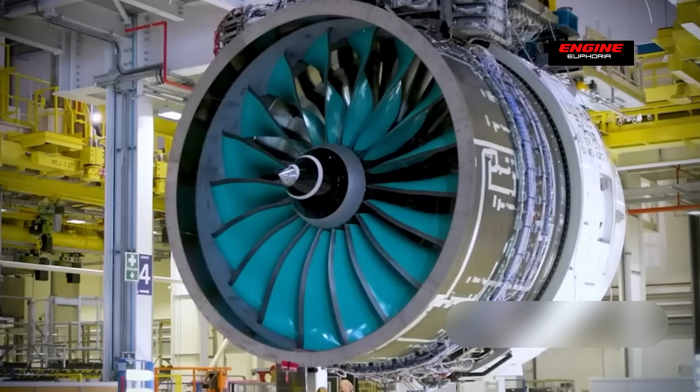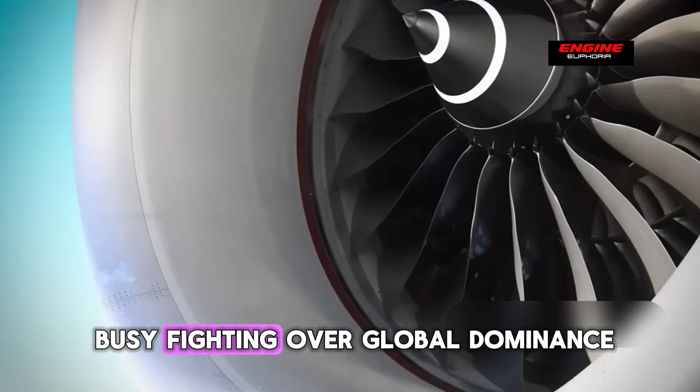Everyone thought Rolls-Royce was finished. After massive layoffs, canceled contracts, and years of silence, the aviation world just, well, stopped watching. Boeing and Airbus were busy fighting over global dominance. GE was showcasing its record-breaking engines. And Rolls-Royce, honestly, was just a name from the past, a legacy brand with no new edge.

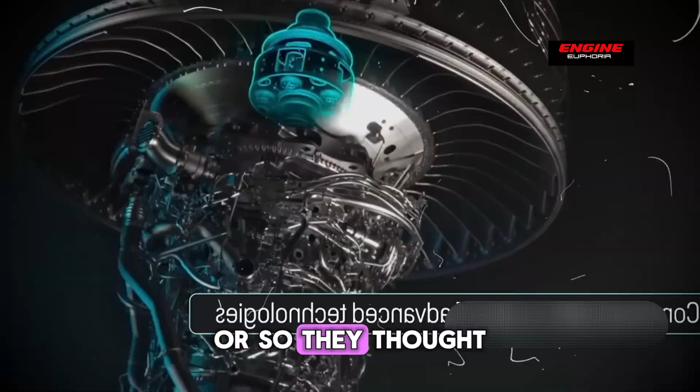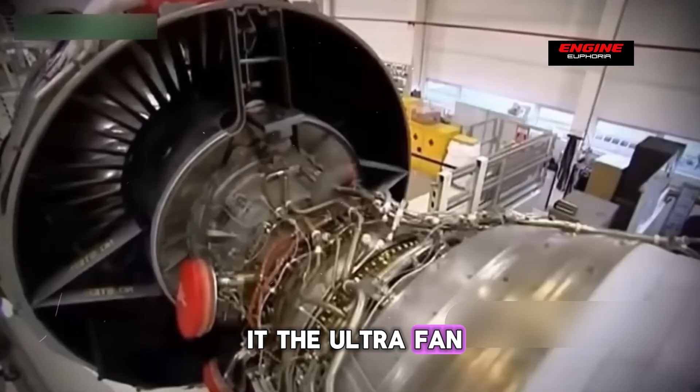Or so they thought. Because while the industry moved on, Rolls-Royce went dark for a reason. Behind closed doors they were building something no one expected. Not a minor update, not a concept sketch, but a fully functional prototype of the most advanced jet engine ever created. They call it the UltraFan. And it doesn't just outperform their last generation. It leapfrogs the entire industry.

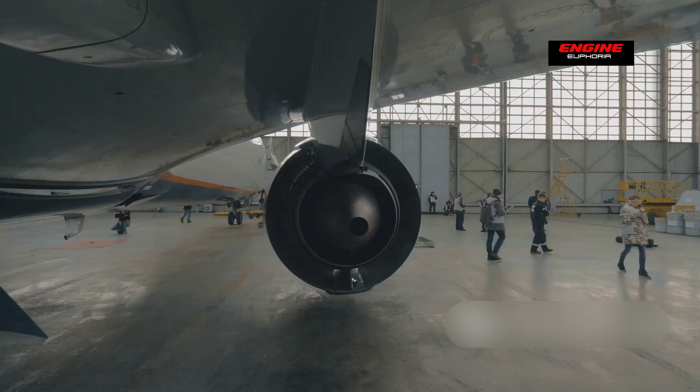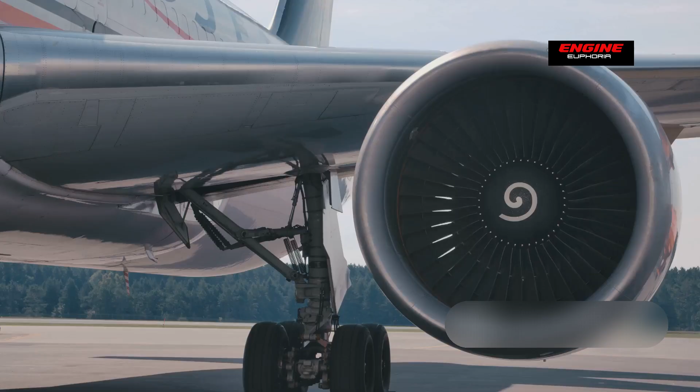It's bigger, lighter, smarter, more efficient, and more importantly, it's not a theory. It works. It's already been tested successfully. While Boeing scrambled with delays and Airbus doubled down on old tech, Rolls-Royce quietly made a move that could flip the entire aviation hierarchy. Because UltraFan isn't just an engine, it's a turning point. It's designed to run on sustainable fuels. It's compatible with hydrogen and hybrid systems, and it delivers up to 25% better fuel efficiency than anything Rolls-Royce has ever built.

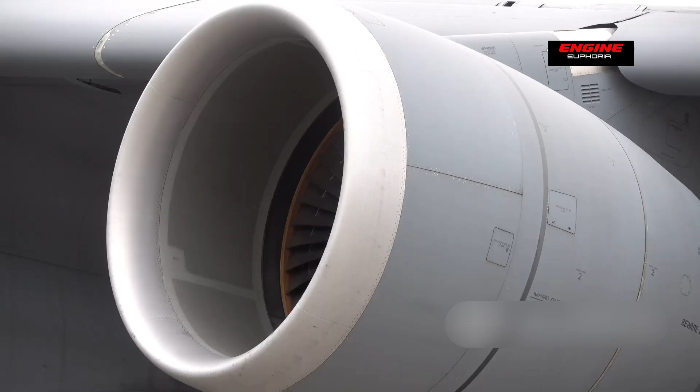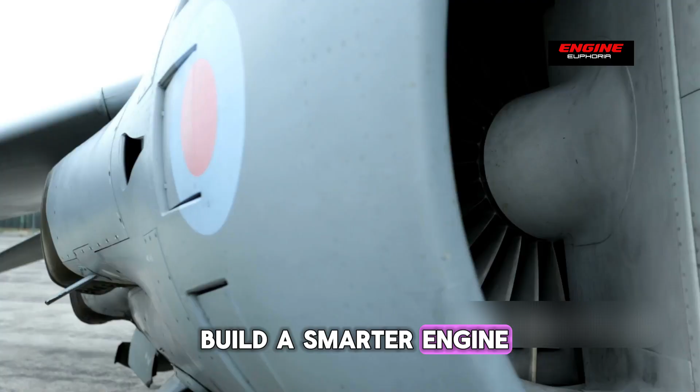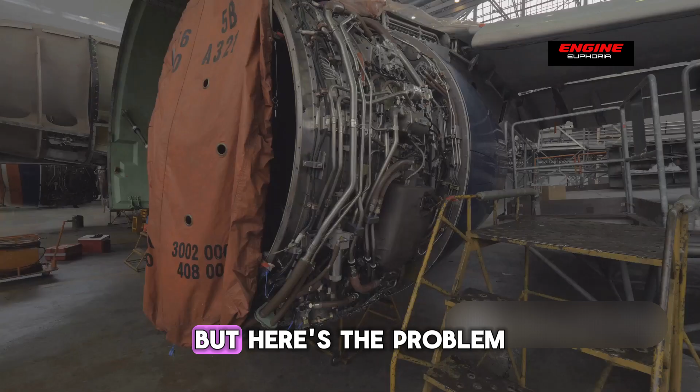The story gets even more interesting because Rolls-Royce didn't just build a smarter engine. They built a direct challenge to the reigning heavyweight, the GE9X. This thing is a monster, 134,000 pounds of thrust. A record-breaking engine made specifically for the Boeing 777X. All muscle, all power. But here's the problem. It's trapped in the past. The GE9X is huge, heavy, and locked into a single aircraft type.

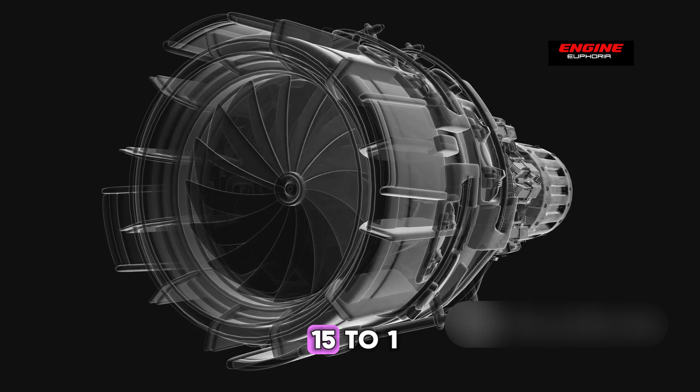Rolls-Royce looked at that and took a different path. They built the UltraFan with modularity in mind. Instead of chasing more thrust, they chased more control. A gearbox that lets the fan and turbine spin at their own perfect speeds. A bypass ratio over 15:1, the highest ever seen in commercial aviation. That alone cuts fuel burn by over 25% compared to the Trent XWB.

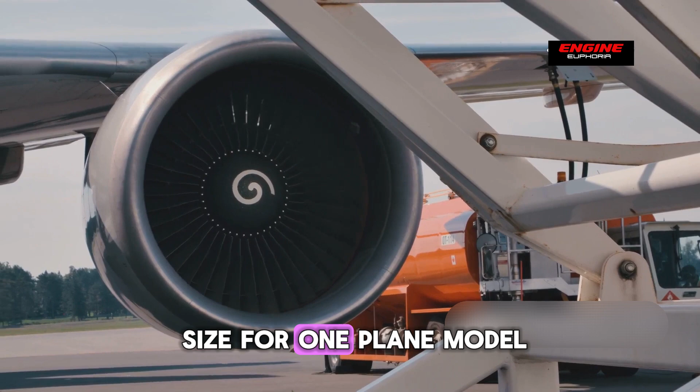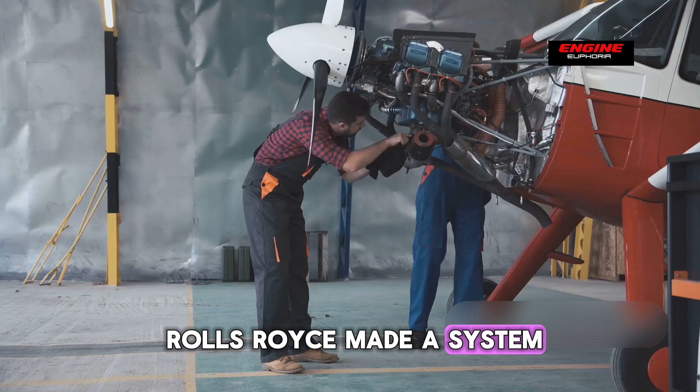And unlike GE's one-size-for-one-plane model, the UltraFan is scalable. Same core, different thrust classes. It can power wide bodies, narrow bodies, and future hydrogen-electric aircraft, all with one platform. GE made a statement. Rolls-Royce made a system. So now the industry is facing a choice. More thrust or more future. Because UltraFan might not be the loudest engine in the sky, but it could be the one flying the longest.

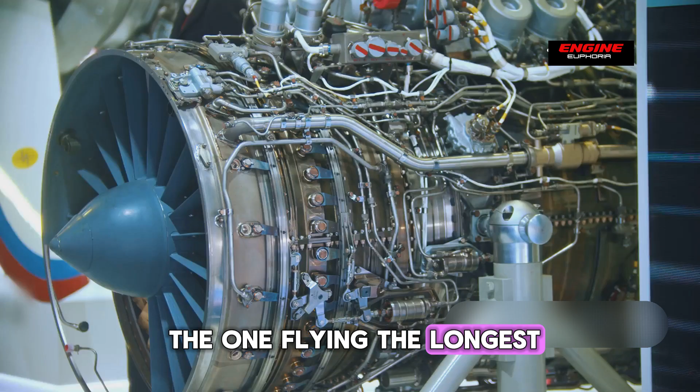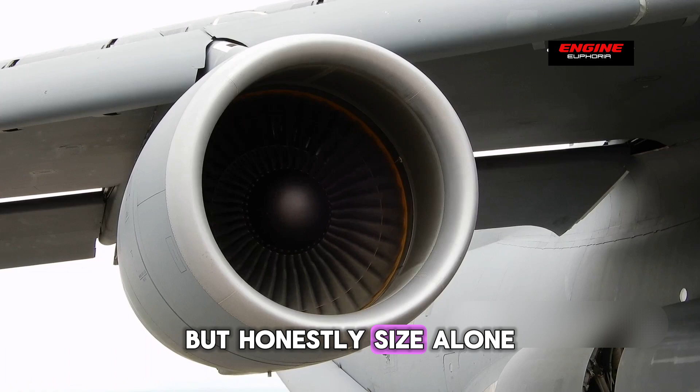And if you're wondering how Rolls-Royce pulled this off, it comes down to engineering precision at every level. Let's start with that massive 140-inch fan. It's actually the largest ever made for a commercial jet engine. But, honestly, size alone isn't what makes it revolutionary. Each blade is forged from carbon composites reinforced with titanium edges. That means it's strong enough to survive a bird strike, but at the same time, light enough to save serious weight.

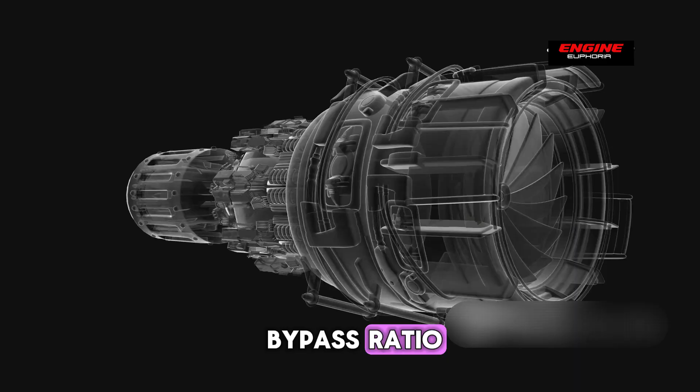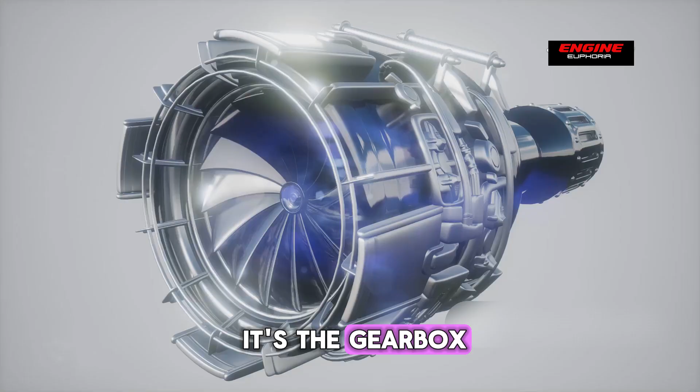Now combine that with a 15:1 bypass ratio. More air bypasses the engine core, creating more thrust with less fuel. Quieter, cleaner, more efficient. Yeah, that's the sweet spot every engine maker has been chasing. UltraFan got there first. But the real secret? It's the gearbox. It decouples the fan from the turbines, allowing both to spin at their ideal speeds. It's kind of like giving the engine multiple gears and it makes everything more efficient.

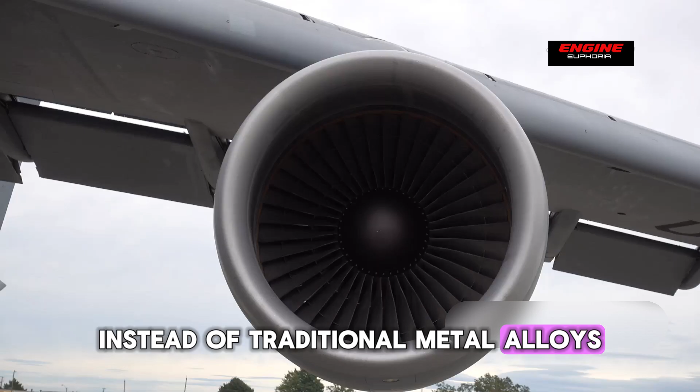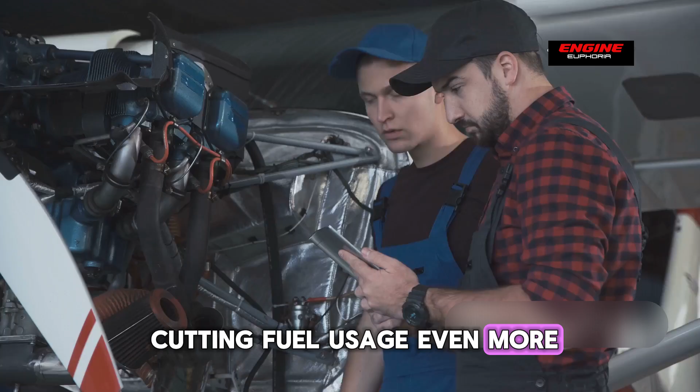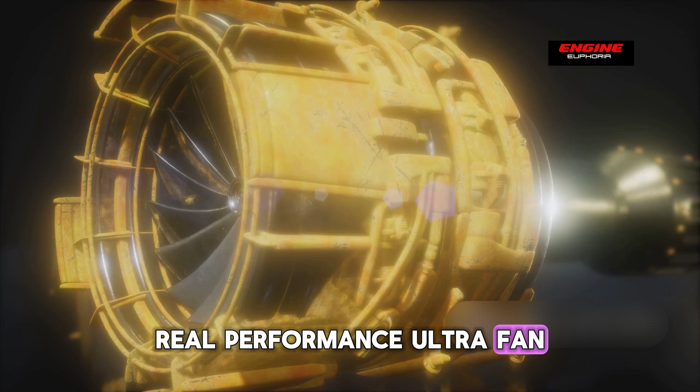Inside the core, Rolls-Royce took it even further. Instead of traditional metal alloys, they used ceramic matrix composites. These materials handle insane heat and pressure, letting the engine run hotter, boosting thermal efficiency, and cutting fuel usage even more. And none of this is hypothetical. It's been tested, verified. 64 megawatts of power through the gearbox. A world record. Real numbers. Real performance. UltraFan isn't a prototype. It's a proof of concept that works.

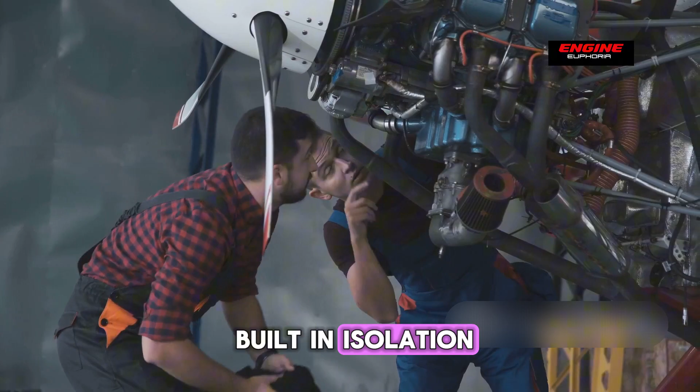And it's all part of something much bigger. Because this engine wasn't built in isolation. UltraFan didn't come out of nowhere. This engine is the product of 4 decades of relentless engineering. Every breakthrough, every failure, every lesson compressed into one machine.

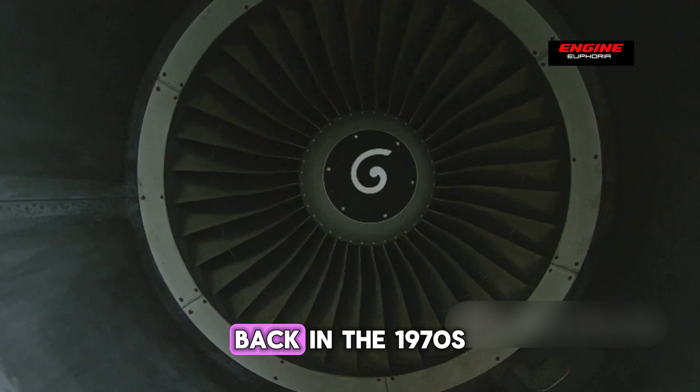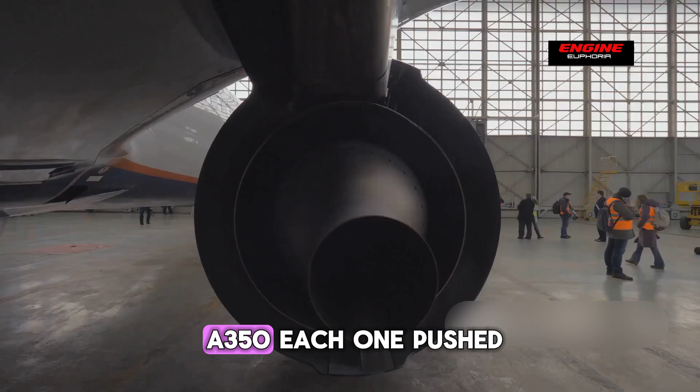Back in the 1970s, Rolls-Royce changed the game with the RB211, introducing the 3-shaft engine design that set the foundation for modern long-haul travel. Then came the Trent series, the 700, the 900, the XWB. Each one powered flagship aircraft like the A330, the A380, and the A350. Each one pushed the limits on efficiency, performance, and emissions. But even the Trent XWB, the most efficient engine in commercial use today, had its limits.

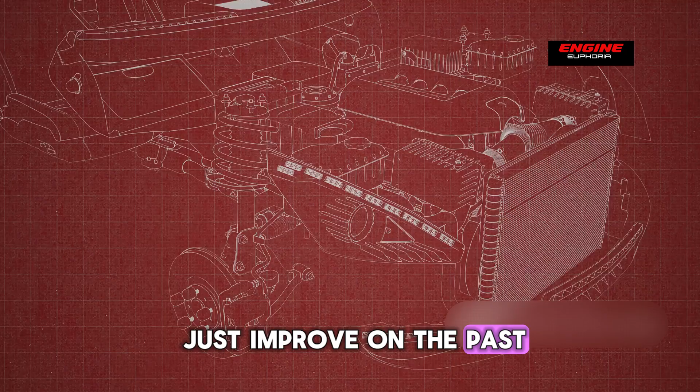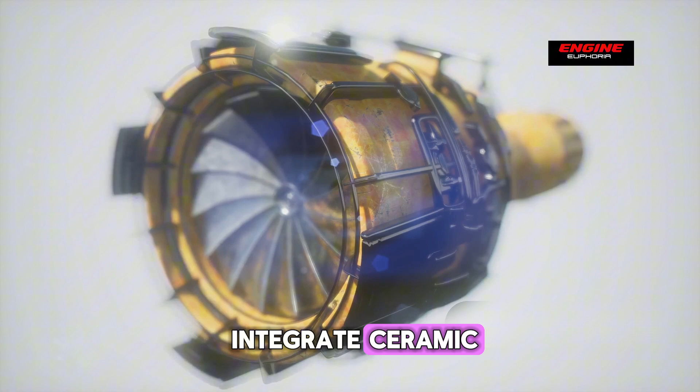Rolls-Royce knew they couldn't just improve on the past, they had to start over. UltraFan is not a Trent evolution, it's a clean sheet design. It's the first time Rolls-Royce used geared architecture in a wide-body class engine. It's the first to integrate ceramic matrix composites in critical hot zones. And it's the first to adopt large-scale 3D printing for structural components, cutting weight, increasing durability, and reducing waste.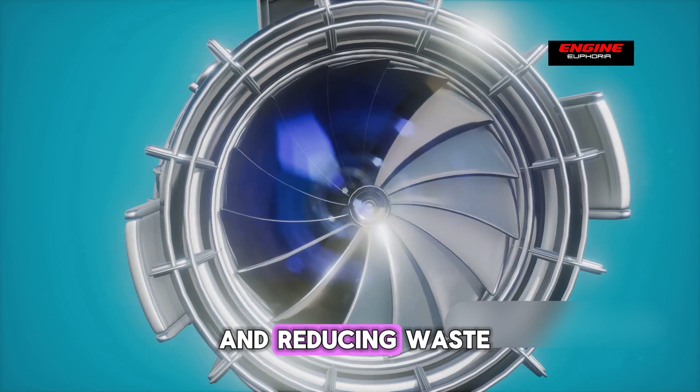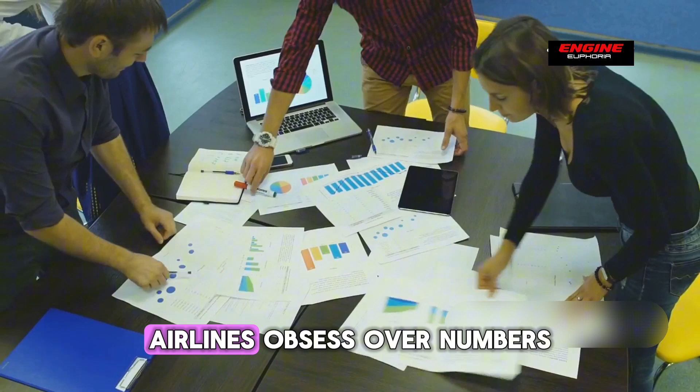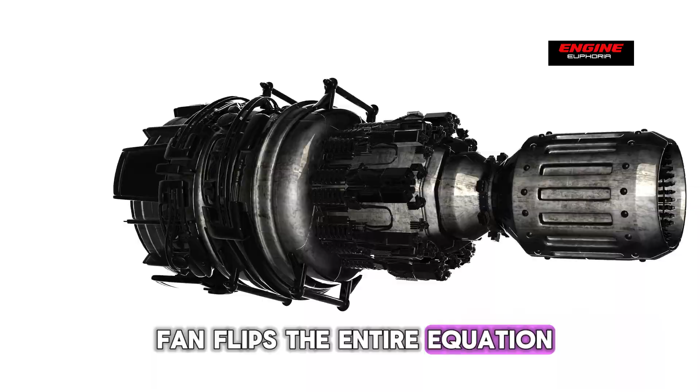But here's the part the public doesn't always see. While most people obsess over thrust and size, airlines obsess over numbers: operating costs, maintenance, fuel burn, regulatory penalties. And that's where UltraFan flips the entire equation. This engine cuts fuel consumption by up to 25% compared to the Trent XWB. That's not marketing fluff. That's millions of dollars in savings per plane per year.

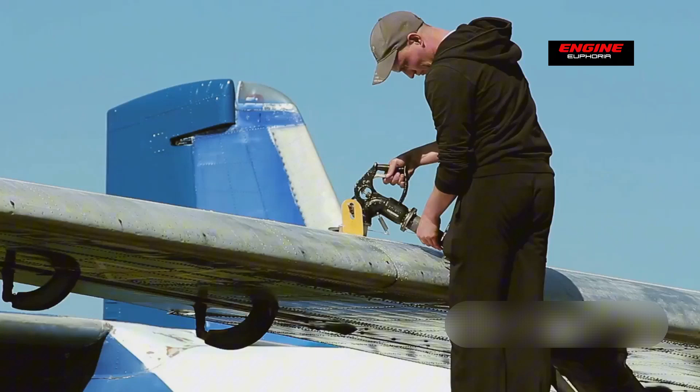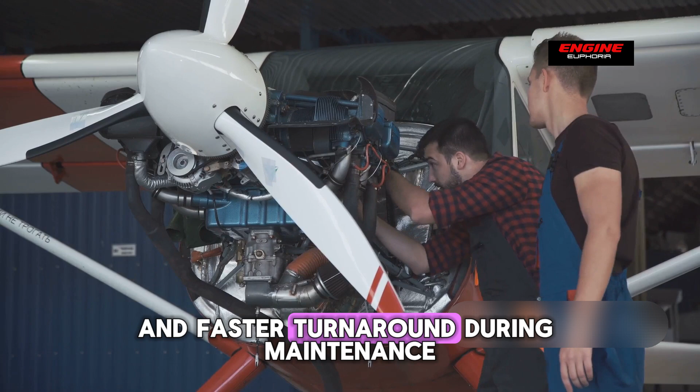At a time when jet fuel eats up over 30% of an airline's total expenses, UltraFan isn't just impressive, it's financially irresistible. And it doesn't stop at fuel. UltraFan's modular construction means fewer unique parts and faster turnaround during maintenance. Its cooler operating temps mean less wear on components. It uses predictive analytics to spot potential issues before they happen, avoiding delays, grounding time, and surprise failures.

And in the background, the pressure is mounting. Governments aren't asking airlines to reduce emissions anymore, they're mandating it. The EU's Fit for 55 initiative is already penalizing high-emission flights. The International Civil Aviation Organization is setting global caps. Even passengers are choosing flights based on environmental impact.

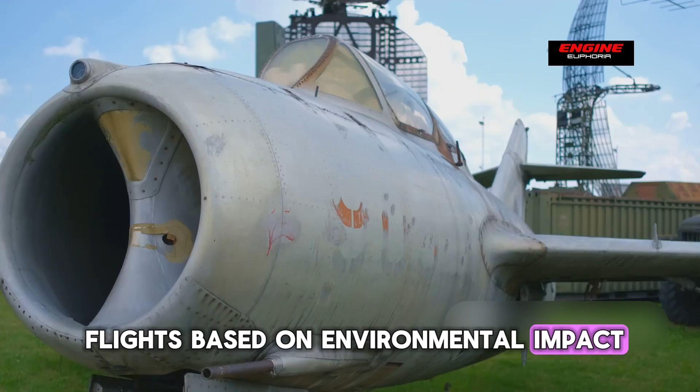The old jet engines were built for an era that's rapidly disappearing. UltraFan is built for what's next. It's ready for 100% sustainable aviation fuel from day one. It's designed with future hydrogen systems in mind, and it's built to evolve, to shift into a hybrid electric role when the time comes. This engine doesn't need to be retrofitted for the future, it's already there.

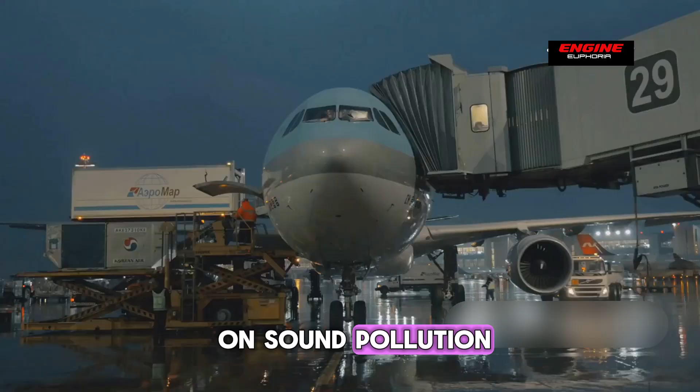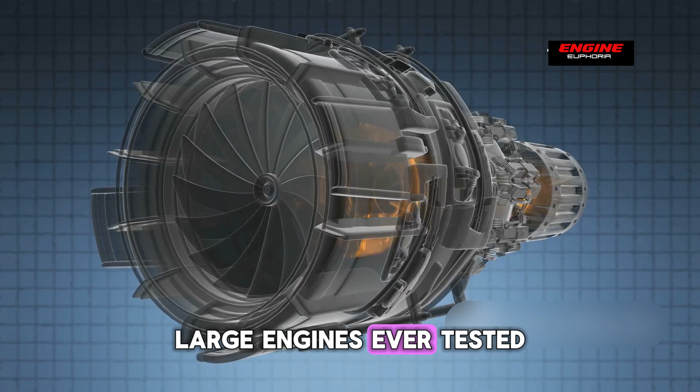And then there's noise, an invisible cost most people forget. Airports across Europe and Asia are cracking down on sound pollution. Noisy aircraft lose takeoff slots, face fines, or get banned from night operations entirely. UltraFan's high bypass ratio and smart gearbox architecture make it one of the quietest large engines ever tested. That means airlines can operate longer hours in more locations with fewer restrictions, which translates directly to more revenue.

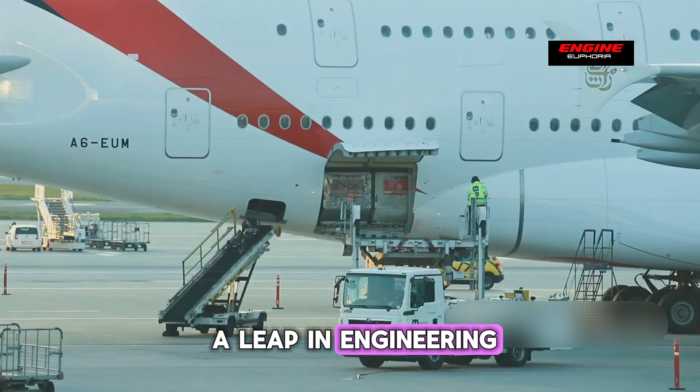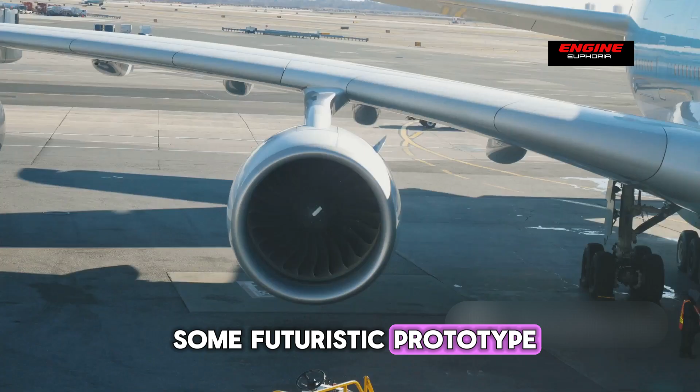So when airlines look at UltraFan, they don't just see a leap in engineering, they see lower fuel bills, fewer delays, reduced carbon taxes, increased flexibility, and better margins. And that's why the industry is paying attention now. Because UltraFan isn't some futuristic prototype, it's the sharpest economic tool airlines have seen in...

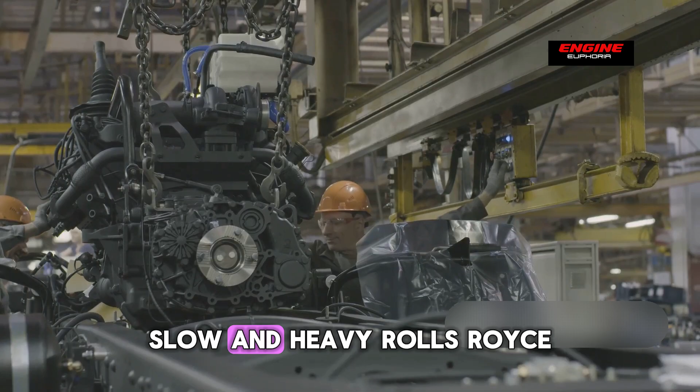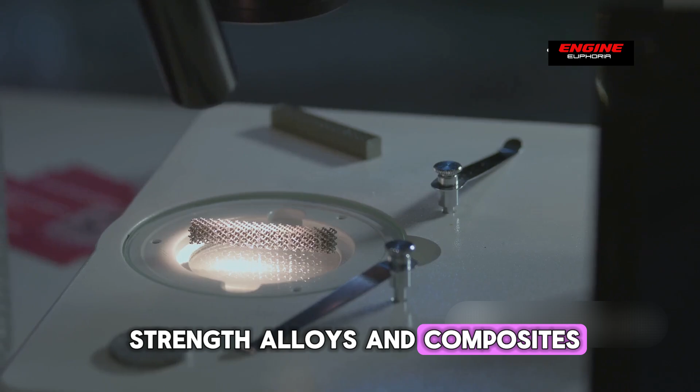Traditional jet engines are made using casting, welding, and machining processes that are complex, slow, and heavy. Rolls-Royce flipped the script. UltraFan's critical components, including blades, brackets, and internal supports, are printed using high-strength alloys and composites. This allows for more intricate airflow designs, less material waste, and lighter parts with higher heat tolerance.

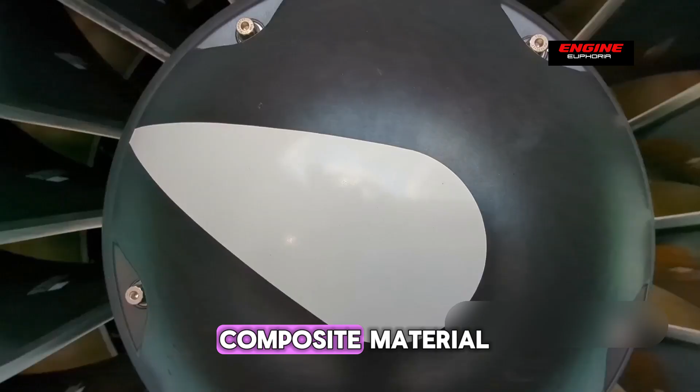Even the massive 140-inch fan blades aren't conventional. They're made from carbon composite material, lighter than titanium, but reinforced with titanium leading edges for durability. That combination reduces overall engine weight while increasing strength. A rare win-win in aerospace design.

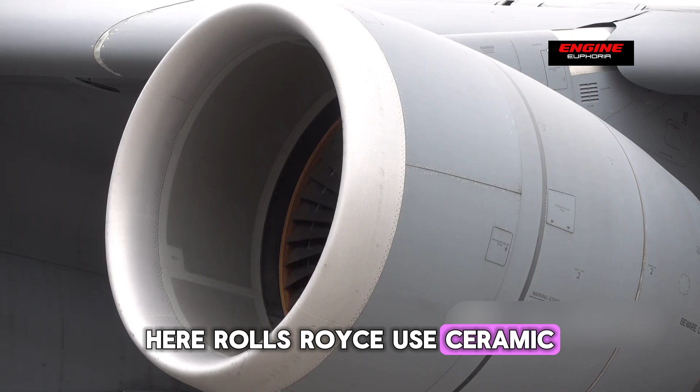And let's talk about the core, the most extreme environment inside the engine. Here, Rolls-Royce used ceramic matrix composites, or CMCs, a material that can handle temperatures far beyond what metal alloys can tolerate. This means the engine can run hotter, which boosts thermal efficiency and cuts down on fuel use. CMCs are also lighter and more resilient, reducing fatigue over time.

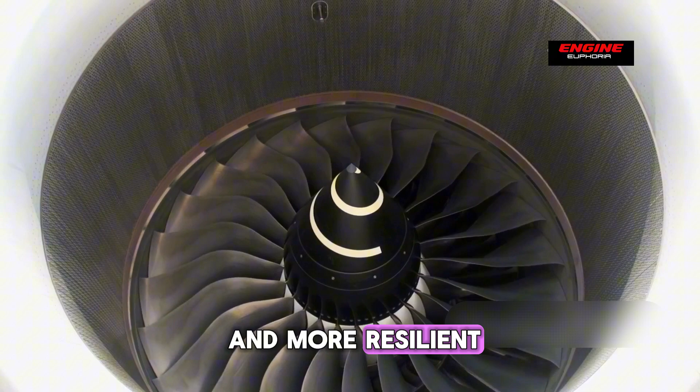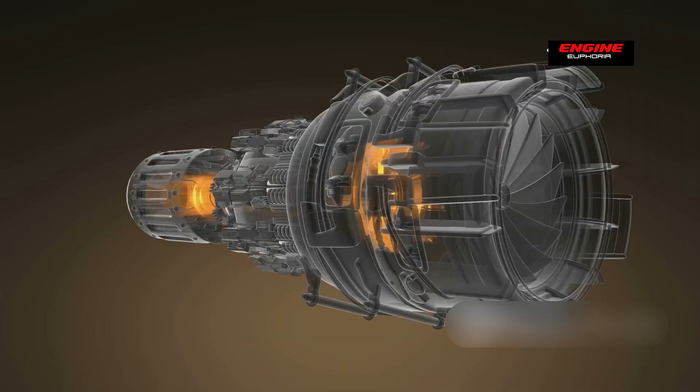And then there's the gearbox, the crown jewel of UltraFan's architecture. It allows the fan to rotate slower while the turbines spin faster, letting each section operate at its optimal speed. This not only reduces fuel burn, but also cuts engine stress and opens the door for modular scalability across aircraft types.

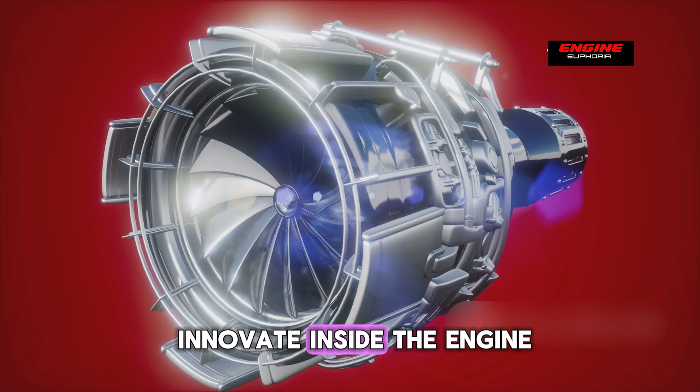But Rolls-Royce didn't just innovate inside the engine. They reimagined how the engine integrates with the aircraft, and for that, they formed a dangerous alliance. Because back in 2018, Rolls-Royce quietly signed a deal with Airbus. The goal: to flight test UltraFan as part of a full integration system, not just as a drop-in engine, but as a complete propulsion architecture, engine, pylon, nacelle, all built together, optimized together.

This partnership wasn't just a handshake, it was co-funded by the European Union's Clean Sky 2 program, a €4 billion research initiative focused on slashing aviation emissions. Airbus knew what it wanted, a path toward the next generation of long-haul and short-range aircraft built with sustainability baked in, not bolted on. And Rolls-Royce? They wanted their engine flying first on the biggest platforms in Europe. It was a perfect match.

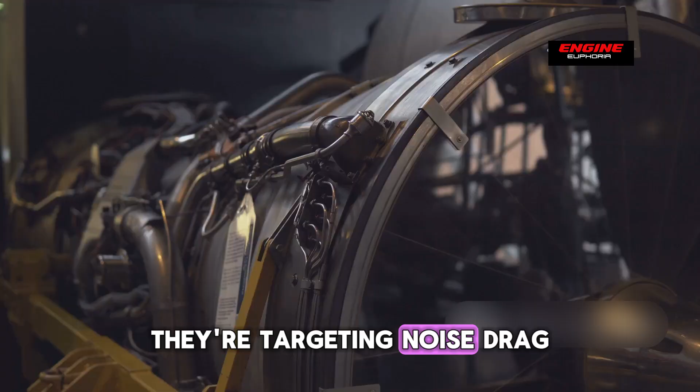Together, they're building integrated power plant systems that go beyond thrust. They're targeting noise, drag, fuel economy, even manufacturing techniques like high-rate thermoplastics and automated welded assemblies that can scale fast.

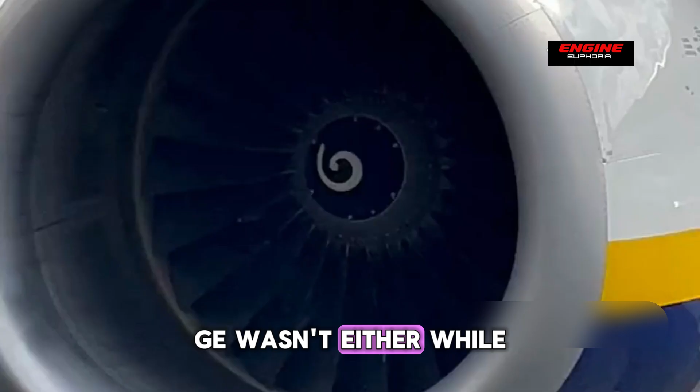And Boeing? They weren't in the room. GE wasn't either. While Boeing bets everything on the GE9X and its aging partnerships, Airbus and Rolls-Royce are co-developing the future in silence. And speaking of silence, UltraFan has one more advantage that almost no one talks about, but every

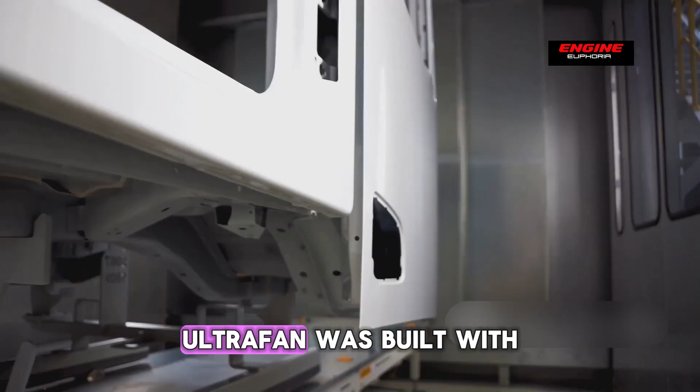airport cares about: noise. Jet engine noise has been one of the biggest thorns in the side of the aviation industry for decades. Takeoffs and landings generate the most complaints from communities living near airports, and governments are starting to respond not just with noise fines but with restricted flight slots, curfews, and operational bans. UltraFan was built with this reality in mind.

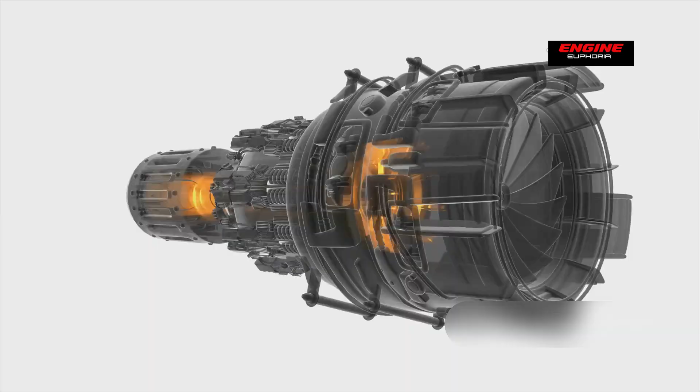Thanks to its ultra-high bypass ratio, the fan moves more air at lower velocities, which naturally produces less noise. And the gearbox design reduces fan speed even further, especially during takeoff and descent, the noisiest parts of flight. The result? A massive drop in decibels without sacrificing performance. For airlines, this means fewer regulatory headaches.

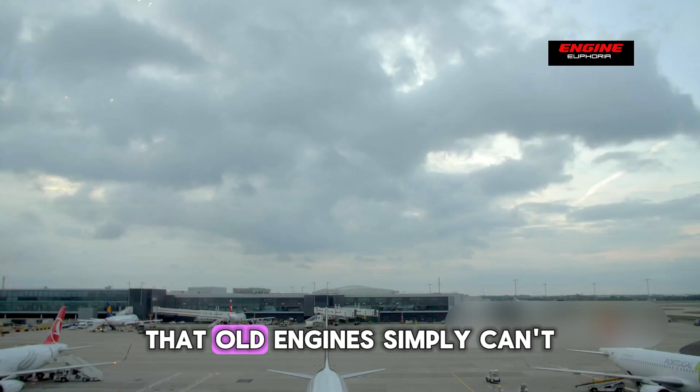They can operate into noise-sensitive airports, fly at night, and apply for additional flight slots that noisier aircraft are barred from. It's not just about passenger comfort, it's about access, flexibility, and revenue. And for airport authorities, quieter engines make expansion plans easier to approve because UltraFan-equipped aircraft meet stricter noise targets that old engines simply can't. It's a subtle advantage, but a strategic one. Because as more countries start treating airport noise like pollution, the quietest engines will have the loudest commercial impact.

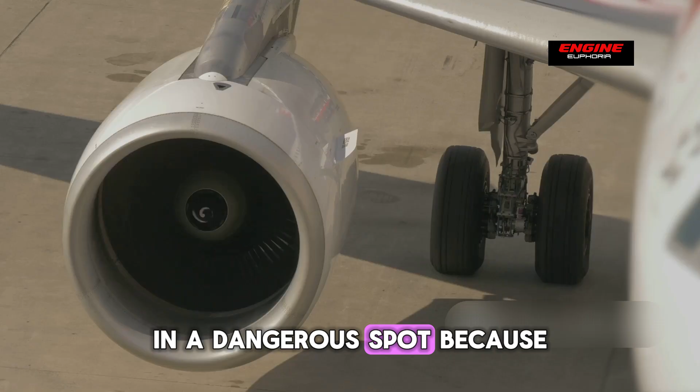So now you've got a jet engine that's not only powerful and efficient, it's light, it's modular, it's future-ready, and it's quiet. So where does this leave Boeing? In a dangerous spot. Because while Airbus and Rolls-Royce quietly moved toward full integration, Boeing stayed tied to GE and to legacy engine architectures that were optimized for raw power, not future flexibility. The GE9X is undeniably powerful. It's also enormous, tightly coupled to the 777X platform and built with a narrower focus.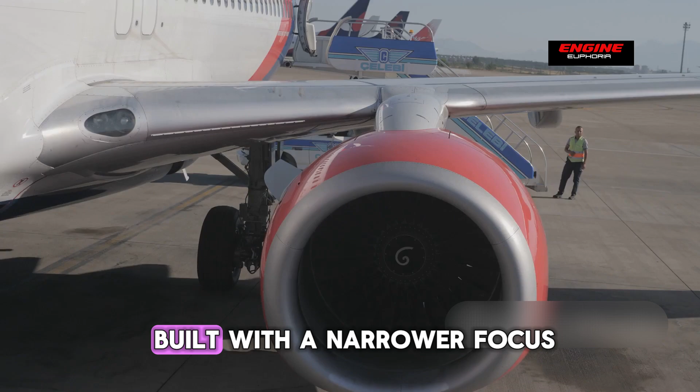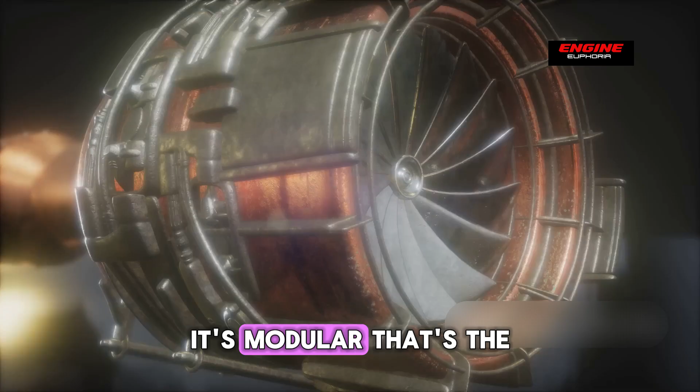And here's the issue. The 777X program has been plagued by delays, years behind schedule. Certification pushed back, orders reduced. Meanwhile, UltraFan doesn't just power one plane, it's modular. That's the part few people grasp, but it's the real masterstroke. UltraFan was built to scale: same-core architecture, multiple thrust classes. It can be tuned for narrow-body jets, long-haul wide-bodies, and even future hybrid electric or hydrogen propulsion systems. It's not one engine, it's an entire ecosystem.

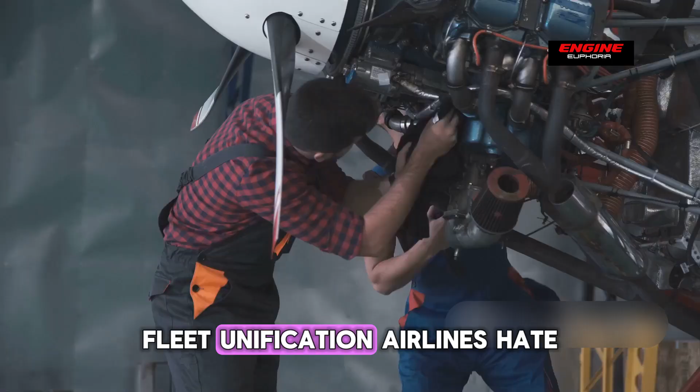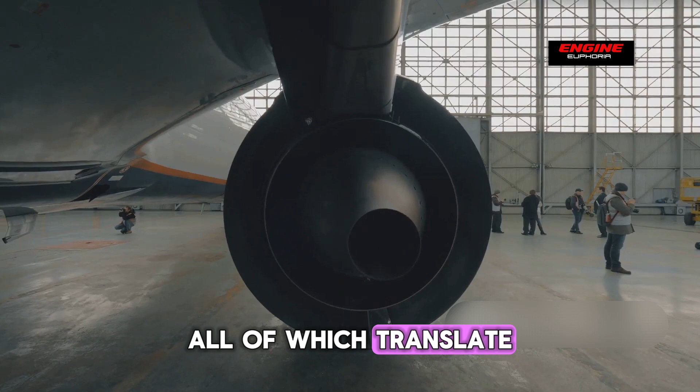And that modular design opens the door to something game-changing: fleet unification. Airlines hate managing multiple engine types, different parts, different crews, different maintenance schedules. It's costly, it's inefficient. UltraFan's adaptability offers a single solution across multiple aircraft models. That means lower training costs, easier logistics, and streamlined service contracts, all of which translate into huge savings over time. And while GE continues to rely on aircraft-specific mega-engines, Rolls-Royce now has something that can move horizontally across the market. It's not just about selling engines anymore, it's about locking in airline ecosystems.

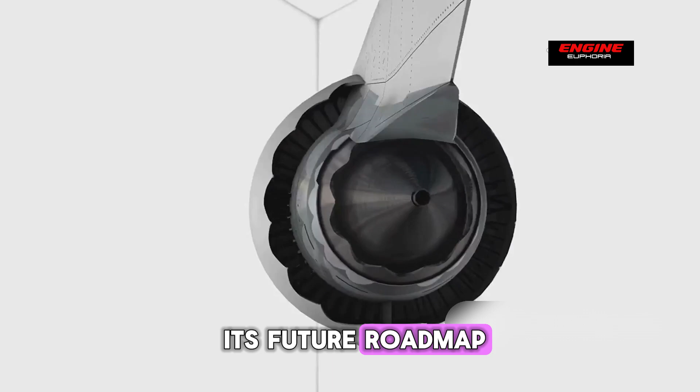And with Airbus already integrating UltraFan into its future roadmap, the writing's on the wall. The next generation of aircraft won't be designed around engines. The engines will be designed with the aircraft from day one. That's the kind of alignment Boeing doesn't currently have. And it's the kind of gap that doesn't just affect one plane, it reshapes global market share.

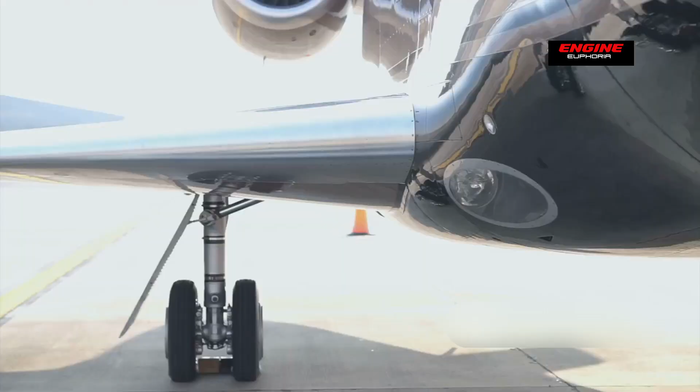Because what happens when you're an airline looking 5, 10, or 20 years out? You see rising fuel costs, tighter emissions targets, new rules around noise, and aircraft that need to stay in service longer than ever before. Now ask yourself, do you bet on an engine built for the last platform, or one built to evolve with whatever comes next? That's the quiet power of UltraFan. It's not just an engine, it's a platform play.

And that brings us to the final point. This wasn't just about building a better turbine, it was about building leverage. Rolls-Royce now holds a key that unlocks flexibility for airlines, performance for passengers, and sustainability for regulators, and they've done it at a time when every piece of the aviation puzzle is being re-evaluated. Post-pandemic economics, environmental pressure, technological acceleration. UltraFan doesn't just tick the boxes, it shifts the playing field entirely.

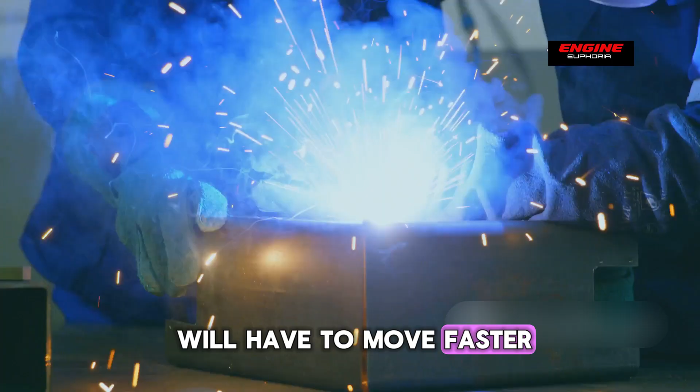It turns fuel efficiency into market share, it turns sustainability into a competitive edge, it turns engine design into airline strategy. And maybe most importantly, it forces everyone else to catch up. GE will have to respond, Boeing will have to rethink, the entire engine ecosystem will have to move faster, smarter and leaner. Because UltraFan isn't just here to compete, it's here to change the rules. So next time you hear someone say Rolls-Royce is just a legacy brand, you'll know better. They didn't just survive, they may have just built the future of flight.